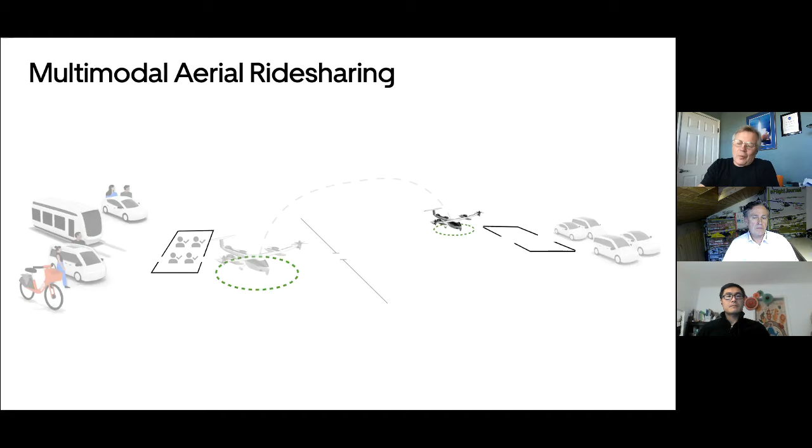Let's talk about the aircraft. Here's an example of an electric aircraft concept developed by Uber to showcase what the properties of the aircraft should be. We believe this is only going to be a real form of good transportation if it's acceptable to the community, and if we get it to a price point where lots of people can use it, not just a niche thing. We're looking for broad adoption, and key elements to make that work include the aircraft having enough speed, payload, and range, and being environmentally friendly.

With an all-electric aircraft utilizing distributed electric propulsion, it can be very quiet even during takeoff and landing—much quieter than helicopters—and during the en route portion of the flight you'll barely be able to hear it at all. It also needs to be incredibly safe. There are opportunities with electric aircraft, for example, to have redundant systems, where you can lose one of the rotors and still fly safely. A number of safeguards will also be looked at during certification of these vehicles to make them acceptable to the communities.

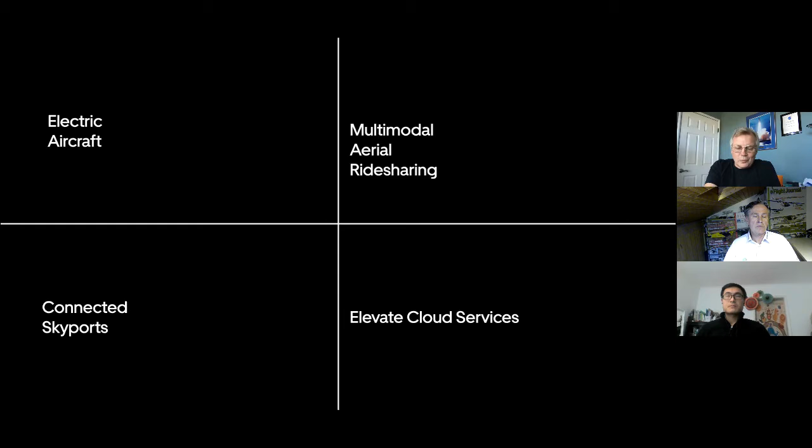The aircraft is one important piece that needs to come together to make all of this happen. But the other pieces are also connected skyports, places where these aircraft can take off and land. We're working with a number of real estate companies to make this happen, and with folks who have designed skyports for different throughput in certain places. Electric aircraft and connected skyports are certainly areas where we partner a lot with other people.

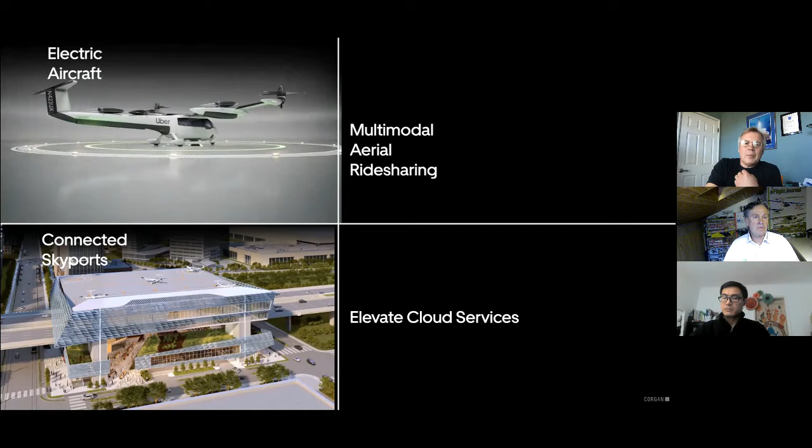The other elements are multimodal aerial ride sharing—being able to very seamlessly take a trip from A to B, have a car pick you up like I described before, and have the air trip integrated. The last part is airspace integration, which we believe is an extension of where UTM, unmanned traffic management, has started for small drones. We want to build on that and weave everything into what we call our UTM system, the Elevate Cloud services, which can interact with other providers as well.

The right-hand side, multimodal aerial ride sharing, and the Elevate Cloud services are things Uber is building in-house, core to our competencies. On the left-hand side, for the vehicles, we are partnering with great companies: Bell, Boeing, Embraer, Jaunt, Joby, Karem, and Pipistrel. Specifically, Joby is on a great path to potentially being certified in a few years, so we are very confident this service can start up in a few years from now.

We want to talk more about airspace integration and how we see it. We think our systems will have to interoperate with traditional air traffic control and air traffic management systems in some ways, just like pilots do. There will be cases where these aircraft operate in a current day environment, even though that's not our preferred mode of operations, but they should be equipped to do that if needed. Our systems will also need to share information with those.

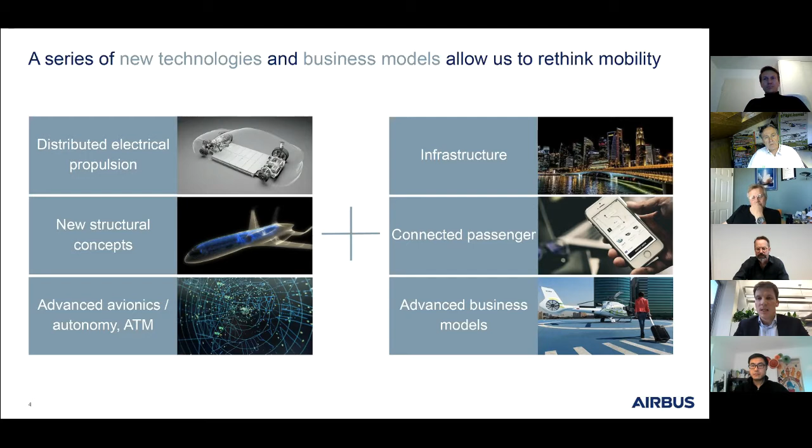We see passengers linked to their mobile phone more than ever, and advanced business models in that area that help us evolve from a premium market towards a mass market. There will probably be certain steps in that. Today, we see a lot of experimentation in terms of new business models happening. We certainly believe that at one stage there will be next generation vehicles that will allow us to lower the cost structure of such transport and really increase the market.

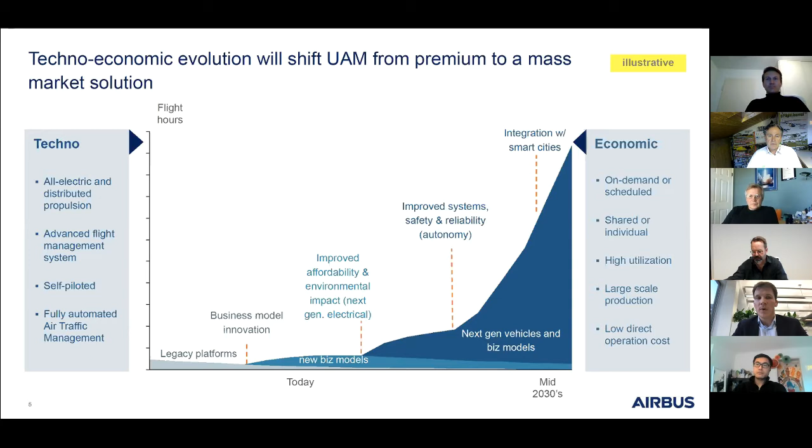But the real scaling probably starts when we discuss autonomy, and we are really able to have these kinds of vehicles operating in an autonomous, safe and reliable way. This will probably be one of the big challenges.

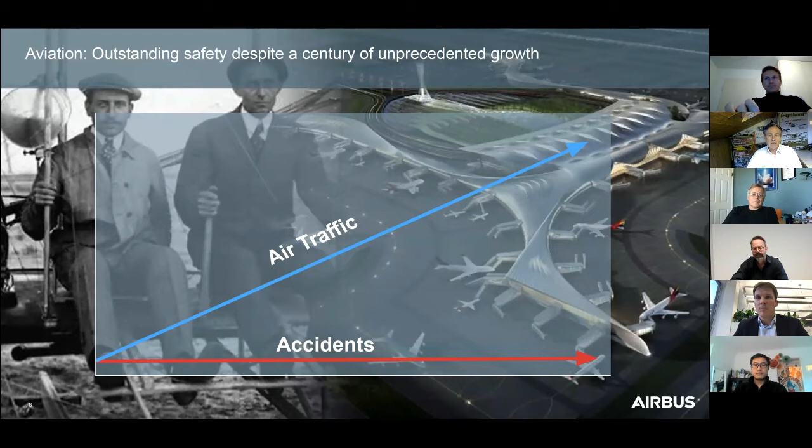It's been in the DNA of Airbus and aviation in general over the past decades that safety was one of the biggest drivers. Traffic has doubled nearly every 15 years, and we see that accidents have stayed at a very, very low level.

This will obviously become extremely important when we want to fly into urban areas and cities. Just a comparison: on the left-hand side you see the San Francisco Bay Area today with a couple of airplanes flying in and out. On the right-hand side, there's a projection done for 2035 with nearly 5,000 vehicles, whether it's drones, airplanes, helicopters, future eVTOLs, and so on.

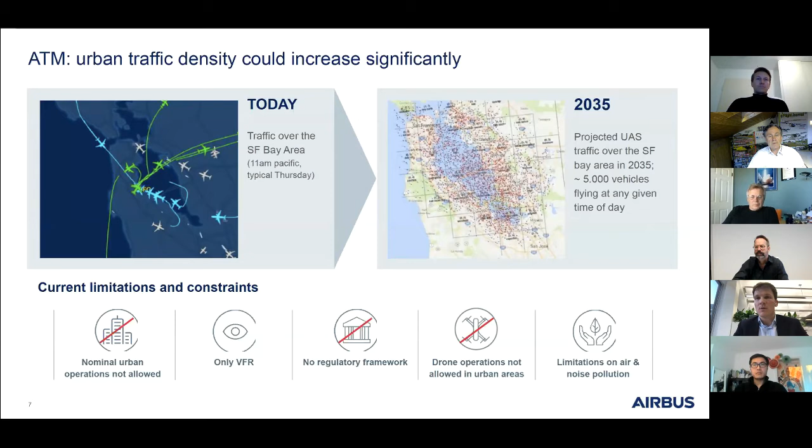It already gives you a bit of an impression that there are things that need to change. There are partially questions on the regulatory framework, questions on noise, and also questions on visual pollution and the way this impacts life in a city.

What we have done so far in the past years in terms of traffic management: we've issued a blueprint in order to structure the discussion and take a first step into how this future roadmap of traffic management could look like for autonomous flying.

We started developing services like LAANC for drone operators to validate trips, and also going further into risk assessment with regards to SORA and others, in order to really judge the risk that a certain trip might have, and to get clearances from the authorities for a dedicated trip, whether it be a pilot, a drone operator, or whoever.

One of the biggest challenges, and this is where I'd like to end the presentation, is that the U-space, the space where today drones and UAS are flying, will slowly grow and connect with the typical air traffic management space as we know it today. Probably by the end of the decade or beginning of the next decade, we will come to a point where we have an integrated system between the typical ATM and the UTM that we are working on to prepare drone operations, eVTOL operations, and so on.

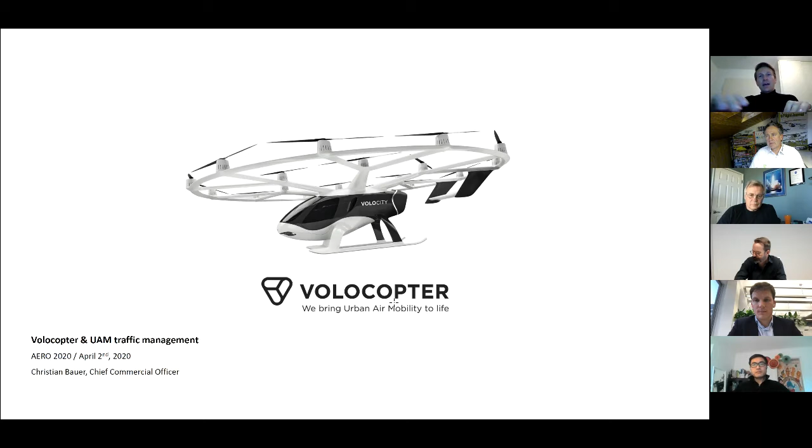Jumping to the next slide, one thing is the certification of a product, which we're already in the process of since quite some time. The next thing is we do not only want to build a vehicle, but also later provide the service to the customer. For that, on the left side, you need customer-centric services, like an app or an interface for the customer. On the right-hand side, you need a fleet and production to build it up. You also need flight and city operations and physical ground infrastructure.

For example, on physical infrastructure, we built up last year in Singapore a so-called Voloport. These nodes will get important. And in the middle, it's the digital air traffic management that connects the dots with each other that we just discussed.

Before I come to some examples of our strategy, I wanted to bring to attention some nomenclature about controlled and uncontrolled airspace. For the audience watching, we have the controlled airspace, where today legacy aircraft operate, flying from airport to airport. And we have uncontrolled airspace, basically the lower airspace, where today a pilot can see other vehicles or aircraft approaching and has to react. So it's visual line of sight rules, partially connected to controlled airspace, partially not.

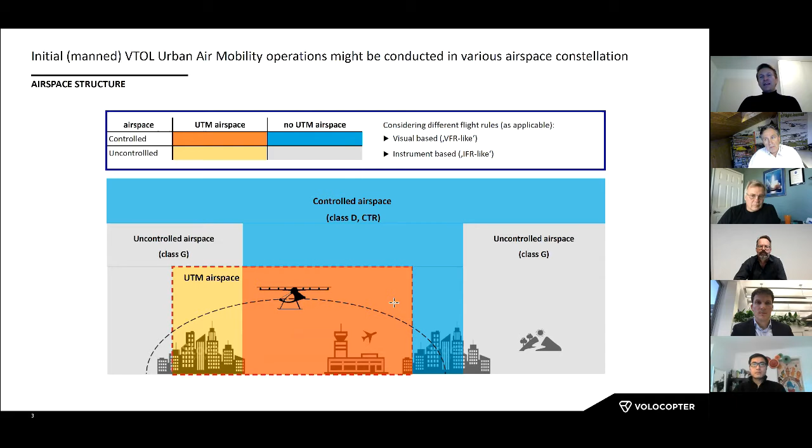What we did there in the last 12 months I wanted to show you on the next slides. We were part of a consortium called GOF USpace, a European initiative from the SESAR consortium, where a lot of participants, smaller drone companies and us as an air taxi company, participated to bring together the consortium of UTM technology providers and air navigation service providers, to really look at how the ATM experience works cross-border.

And what basic routines were then tested - you see in the middle a picture of Bruchsal. We tested systems at our platform, feeding into those new UTM system data and getting data out from the pre-flight, in-flight, and post-flight service, and also integrating U-space services with ATC rules and regulation. That was the main context we worked on, together with the authorities in Helsinki, where you see over there.

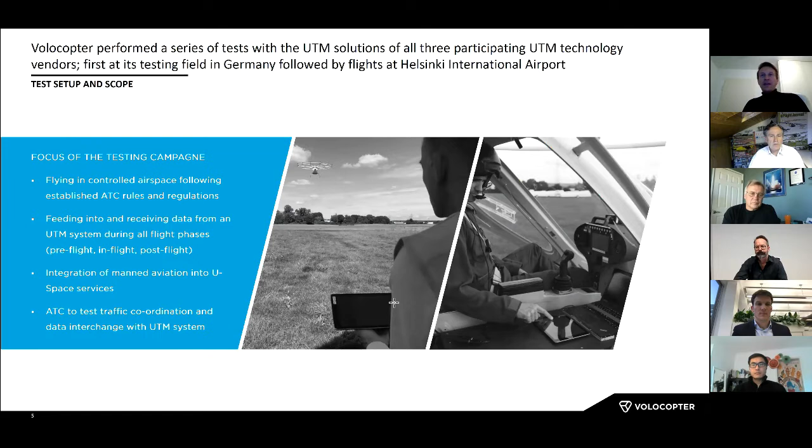We had this demonstration done in August last year. We were connected directly to the tower - you see the right picture there - so the tower could see us. We had some transponders in the vehicle, and we could also see the legacy planes coming in, which shows already that those systems in such an environment can work.

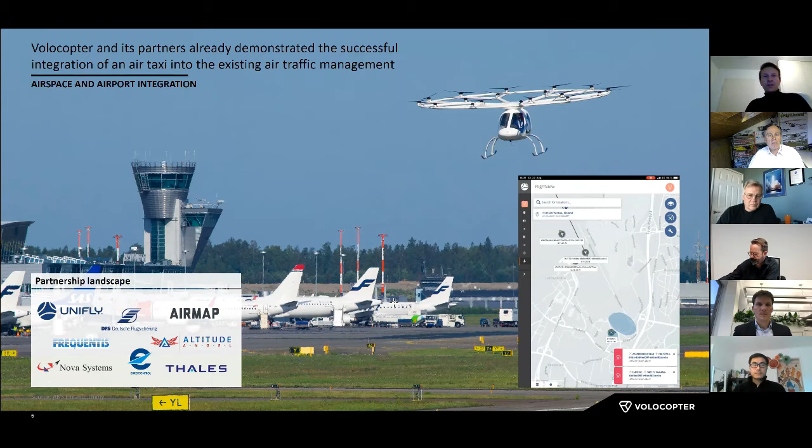So from controlled area also to an uncontrolled area, we tested systems like Unifly, AirMap, DFS, Altitude Angel, Nova Systems, and so on, and did also another test in Singapore in October last year with some of the systems.

Our main points we took out of that: I think you can start without those systems if you have a pilot. But if the air traffic gets more congested, as Markus mentioned, digital solutions are the help you need, because if not, you need a lot of air traffic controller people physically being there and controlling the airspace.

Secondly, we would need to define, if we integrate that and go to an autonomous route, the aircraft minimum equipment. So what does every drone or vehicle have to have on board to be recognized in that space? Also, the coverage of communication, navigation, surveillance is not always optimal.

When you fly outside the control area to the controlled area, how do you cater with that? The rules of procedures in that area, also to which altitude can we fly or not? And how do the different UTM systems that we might have globally work with each other—maybe there will be a standard, maybe there will not?

So those were the outcomes, challenges, and questions we are still working on, and we're looking forward to your feedback and questions. Thanks a lot.

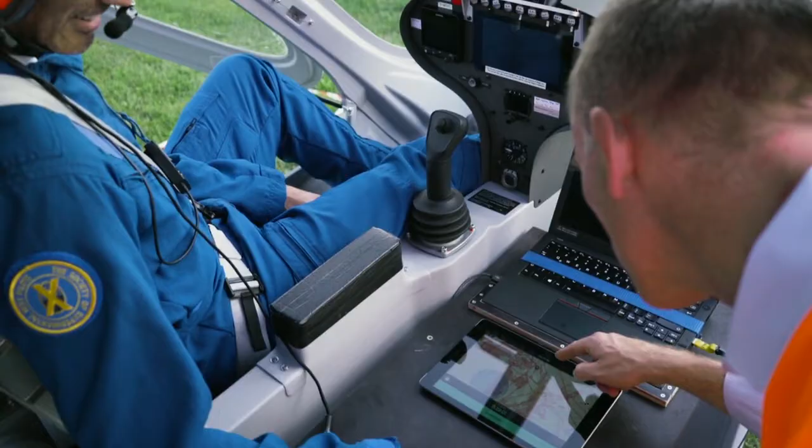We will keep the questions for later. Let me now introduce you to Corbin Hoover—unlike the other three, whom I know already quite a while and who probably know each other, Corbin is quite new in this field of eVTOL, at least for the common public. Corbin, perhaps you can tell us a little bit about your approach and what this technology is doing.

Thank you very much, Willi. I've listened very attentively and I'm very excited about what you gentlemen have just reported upon. We have D3 Technologies AG in Munich, a startup company—we are the most junior around the table here, quite definitely. We have put together a fairly interesting brain trust of people concentrating exclusively on the vertical you gentlemen have mentioned concerning air traffic management for this future UTM use case.

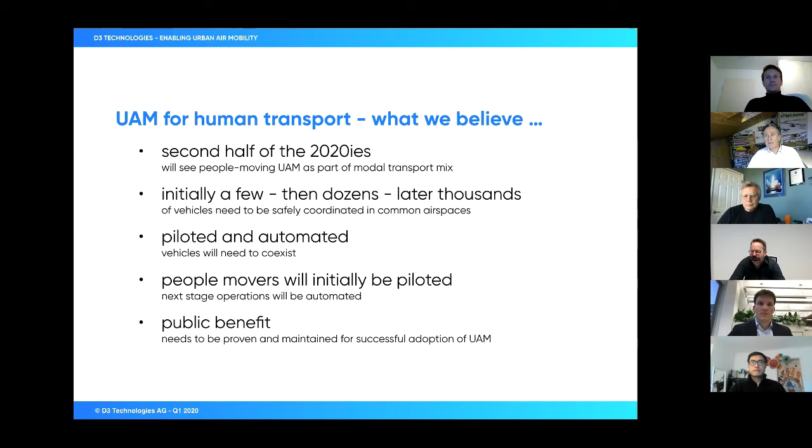We believe that a system integrating all of the above aspects needs to provide navigation, unified data, and communication to the ecosystem partners, and that the system in the end needs to be open, universal, and complete.

To elaborate a little, navigation means there needs to be strategic deconfliction, including the opportunity to offer real-time updates after tactical deviations. This means we believe there will initially have to be some kind of deterministic traffic planning that allows for a high-level safety concept to be realized. I'll talk about that in a moment.

We believe there needs to be the opportunity to access unified data to get a common situational picture. And we believe that communication between vehicles and the air traffic system needs to include safety critical communication. So we do not think communication is an add-on, but it needs to be a safety critical element of the entire development.

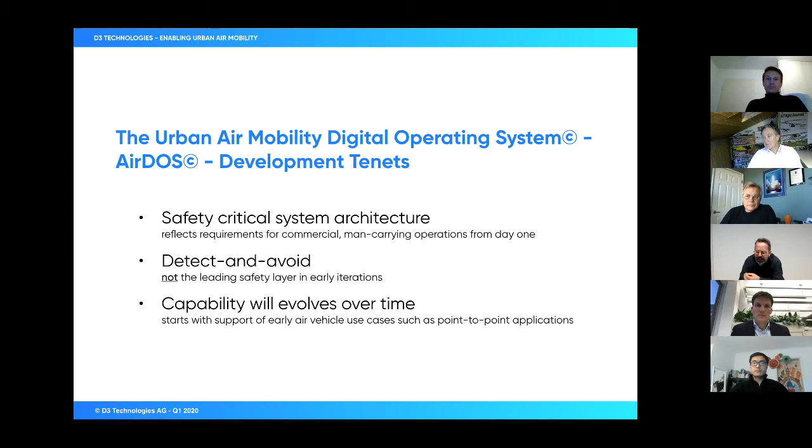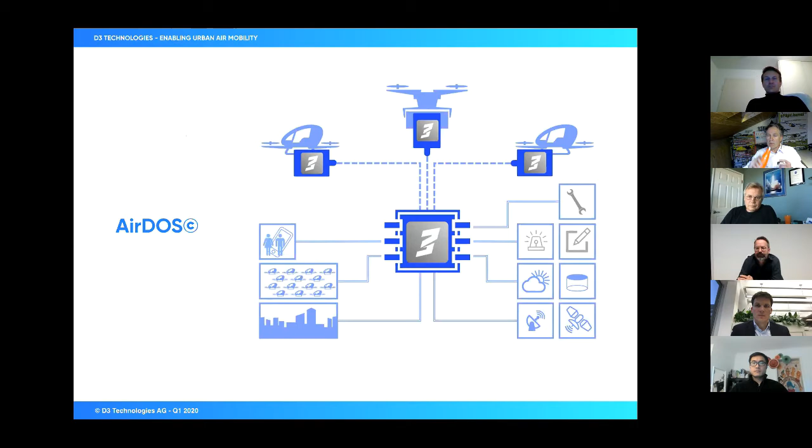These are the tenets we are looking at, and essentially we believe there needs to be a common backbone that combines all the various services that need to be integrated and disseminates valid information to all the system participants, so everyone can rely on a unified situational appreciation. That's what D3 is spending its time on, and we're quite excited to engage with you in the coming weeks, months, and years to find out your specific requirements and accommodate those in our development. That's it from D3 at this point. Thank you very much.